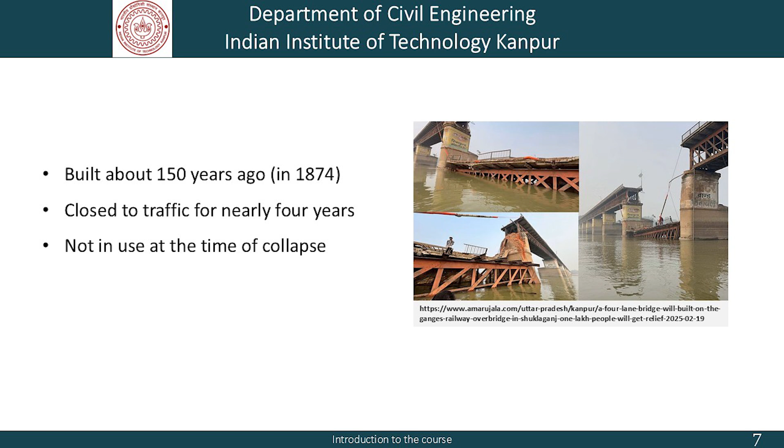And therefore, when we plan infrastructure, we have to keep in mind that whatever we are planning and constructing is going to be in operation for maybe 100 years. And therefore, it's not only the structural issues that have to be kept in mind, but also functional issues, issues such as sustainability, financial viability, and so on and so forth. That is the crux or the backbone of our discussion in this course on infrastructure asset management.

Now, what are the expectations from infrastructure asset management? The management practices should be sustainable, they should be resilient, they should be adaptive to climate change, they should be backed by data-based decision making, and the approach should not be ad hoc. There should be a clear life cycle perspective, and strategic decision making should be utilized to optimize benefit. And finally, there should be a risk-based prioritization, which could be called reliability.

Now, these are some of the words that we hear when we talk of infrastructure asset management, except that we need to understand that all these terms need to be understood in the context of infrastructure management in a uniform way, and all stakeholders, whether it is users, contractors, designers, regulators, or financiers, have to understand and speak the same language. They have to understand each other much better.

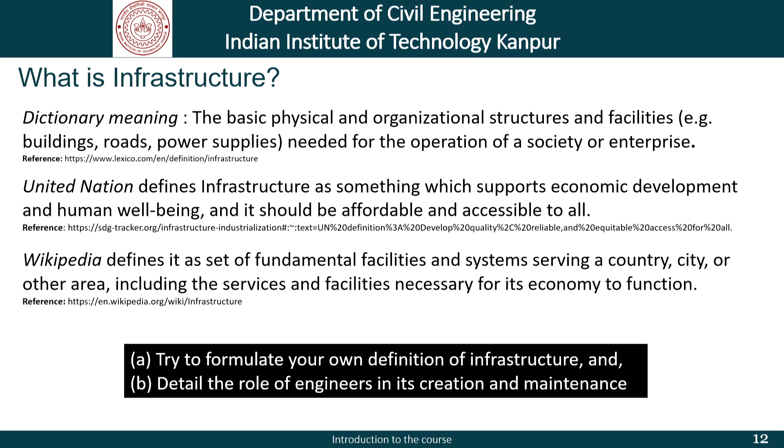You are of course welcome to formulate your own definition of infrastructure and then think about and detail the role of engineers and architects. When I say engineers, I often include architects in that. So, my apologies to my architect friends that I may not mention them specifically at times, but I include them in that fraternity. Detail the role of engineers and architects in the creation and maintenance of infrastructure.

Now, coming to asset, one of the definitions could be it is an item of property owned by a person or company regarded as having value and available to meet debts, commitments, or legacies. Investopedia describes an asset as a resource with economic value that an individual, corporation, or country owns or controls with the expectation that it will provide future benefit.

Assets are reported on a company's balance sheet and are bought or created to increase the firm's value or benefit the firm's operations. Assets are also something that in the future can generate cash flow, reduce expenses, or improve sales regardless of whether it's manufacturing equipment or a patent. So, there are these different ways of looking at an asset.

One simple way of looking at assets would be that say at time t is equal to 0, you had 1 lakh rupees in the bank. You choose to buy land for 50,000 rupees. Now, the moment you do that, what your 1 lakh asset base was has suddenly become 50,000 in the bank and 50,000 as land. So, now when it comes to infrastructure assets, how do we extrapolate this definition? That will be the real question.

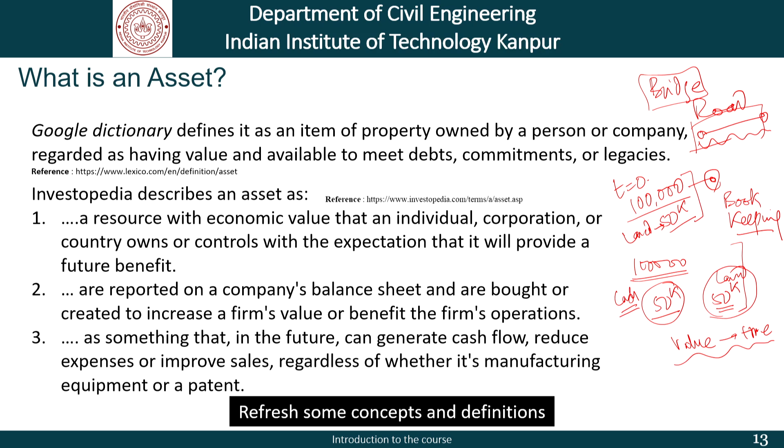And when it comes to management, Wikipedia defines management as activities of setting the strategy of an organization and coordinating the efforts of its employees or of volunteers to accomplish its objectives through the application of available resources such as financial, natural, technological and human.

We can also define management as a set of principles relating to planning, organizing, directing and controlling, and application of these principles in harnessing physical, financial, human and informational resources efficiently and effectively to achieve organizational goals. Now, this definition of management again is there in the books. The challenge is, how do we interpret, what do we interpret in the context of infrastructure assets, which could be roads, bridges, buildings and so on and so forth.

Also, what is the role of technology and therefore engineers and architects in management of infrastructure assets? This is a loaded question. The question being asked really is, there are two ways of looking at managers of infrastructure assets. One is engineers and architects who are familiar with the processes that went into the design and construction of those assets, creation of those assets.

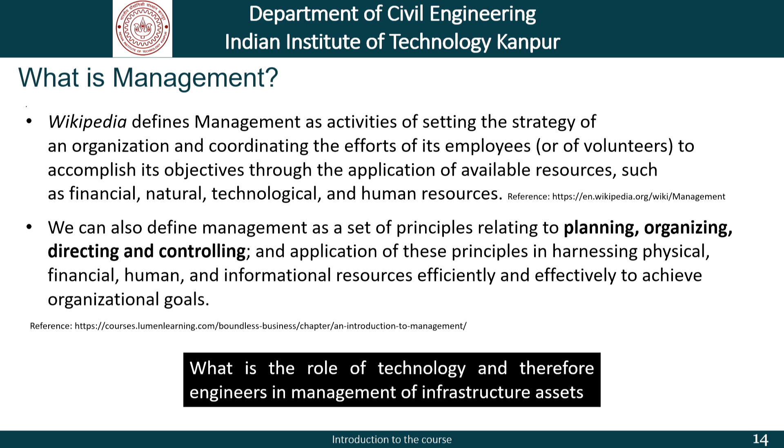So, the question is, which set of people is better suited to carry out the job of infrastructure asset management? I guess I have already given my answer to it. You can think about it and come to your own conclusions. Now, infrastructure is characterized by high life expectancy, maintenance of a product and not a machine.

Infrastructure assets are very often, almost always, publicly owned or controlled, and the investment involved is huge, and therefore, cost benefit analysis kind of a thought process is very difficult to apply. One of the reasons why the private sector was not playing a major role in the infrastructure development was precisely the huge investment and the complexity involved in evaluating cost benefit ratios and the benefits which may not accrue immediately but over a long period of time and so on.

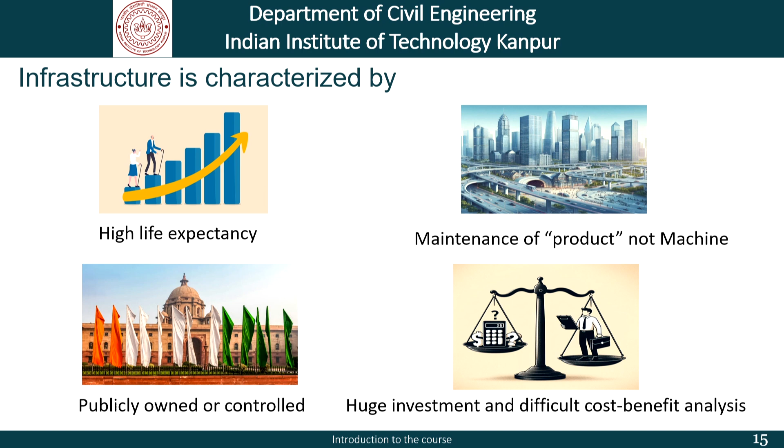That is why it was only the government which had the funds to invest in infrastructure sector, whether it was transportation, whether it was defense or education, health and so on. These were key infrastructure which was publicly owned. Even now, the infrastructure is largely publicly owned, and you can make a survey of your own and come up with your own conclusions. As far as the growth of civil infrastructure in India is concerned, we now see a lot of emphasis on metros.

I said before that in countries like India, where we are building the infrastructure, obviously we will have a lot of investment in these sectors, in these projects, and it is important that our engineers are trained in the thought process of asset management, so that they create assets which are easier to manage.

In the last decade, we have had a lot of development in the road sector, a 60% increase in the national highway network, 3.74 lakh kilometers of rural roads added, and an increase of 500% in the budget as far as highways is concerned.

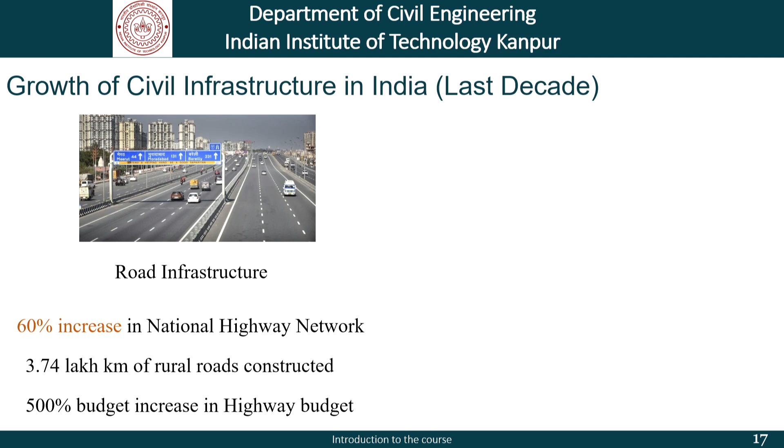Airport infrastructure in India also has seen a huge boom with 84 new airports constructed. Schemes such as UDAN have been launched and 21 additional greenfield airports identified. So, this is all part of the emphasis that the government or the society in India has on building infrastructure.

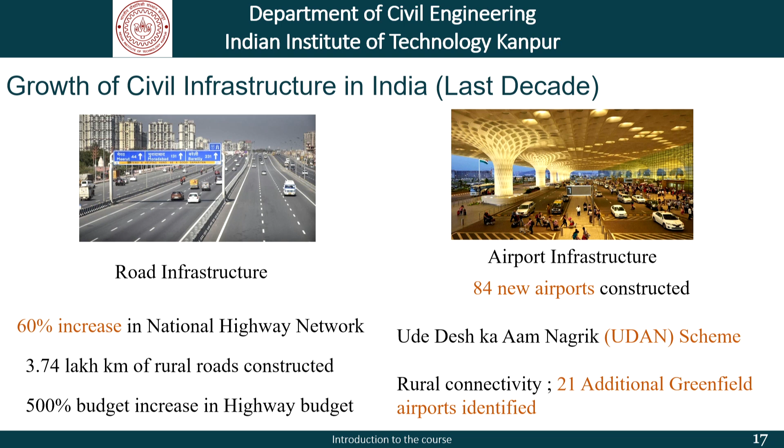Now, a word about the life cycle of infrastructure. The first step is a concept and plan, where you say, okay, let's build a bridge, let's build a road from point A to point B, which will involve some tunnels, some bridges and so on. The next stage is getting down to business and carrying out the design. Remember that till such time as we complete the design, or at least a large part of the design, nothing has really happened on the ground.

Finally, decommissioning. That is the kind of thing that we talked about when I showed you the picture of the bridge in Unnao near Kanpur. And let me also say that if we leave the infrastructure which is not being used just to be on its own and wait for it to collapse or decay or whatever it is, it might be extremely detrimental, as we will see in one of the examples as we go along in this course.

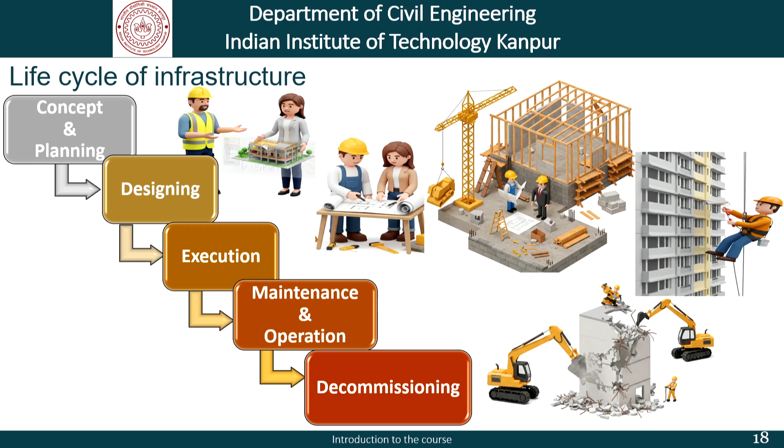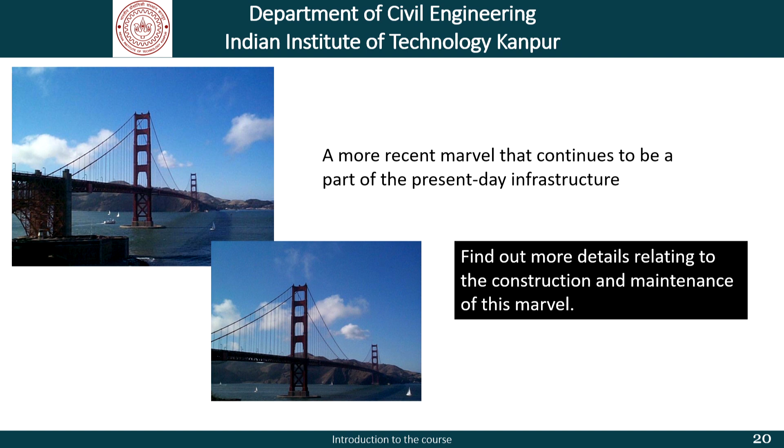This is another modern marvel, which is the Aqua Line, which connects the city of Kawasaki in Kanagawa Prefecture with the city of Kisarazu in Chiba Prefecture and forms a part of a national highway. So, this is the Chiba Peninsula in Japan. This part is Tokyo, and this Aqua Line connects these two points here through a 23.7 kilometer road, which includes 4.4 kilometers of a bridge and 9.6 kilometers underneath the bay tunnel.

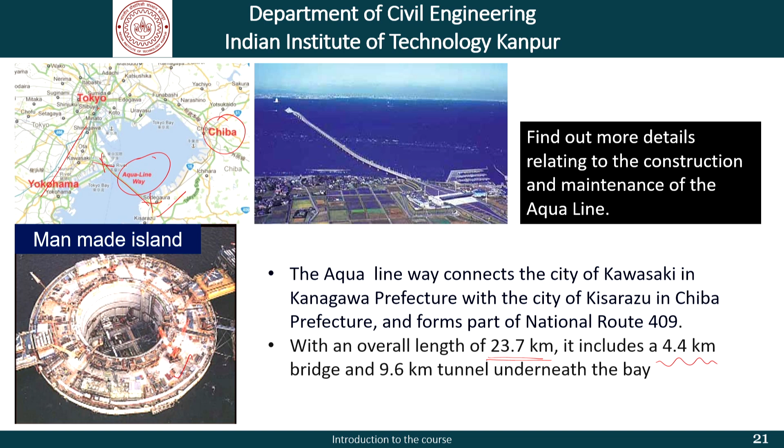Now, this is a man-made island which is created in the middle of the sea, where the transition from the bridge to the tunnel takes place. The important thing that I wanted to show with this kind of a picture, or perhaps the next one as well, is the scale of infrastructure creation. It is a huge investment. It is not easy to do these kind of projects, and therefore, it is important that adequate care is taken to ensure their durability and the fact that they continue to serve the society for a very long period of time. Please do try to find out more details relating to the construction and maintenance of the Aqua Line.

This is another example from Japan, Akashi Strait Bridge, which was constructed about 25-30 years ago. This is another mega project under construction at that time, involving major commitment of resources, and finally it becomes a precious national asset. Here too you can find out more details relating to construction and maintenance of this modern engineering marvel.

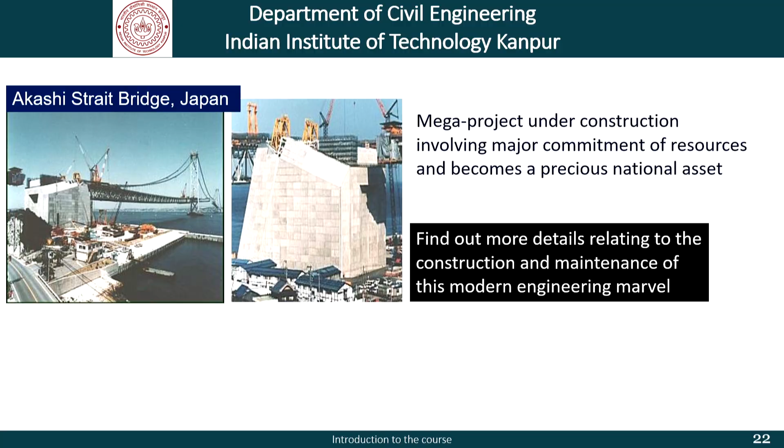The idea of this course is not to emphasize too much the technical issues involved or the technologies used, but to understand that yes, modern technology, mechanization, modern materials, better understanding of material behavior, better understanding of the material environment interaction, better specifications have enabled us to build these huge structures, very massive structures, and it is important that we also understand the importance and the responsibility of maintaining them.

In India as well, the Konkan Railway, the Vashi Mankhurd flyover, Kopili Dam, cooling towers in power plants, all these are examples of investments in infrastructure.

Now, so far we had seen examples of what we build. Now, I want to show you some examples of structures, what they look like after a certain period of time. Now, the certain period of time is a googly. I am not naming how much time is involved, because that varies from structure to structure, and we will discuss it separately. Having said that, here is a structure.

After some time, it is found that the concrete at the time of construction did not reach the ducts of the pre-stressing cables and left a void. As a result, the ducts and cables show a lot of corrosion.

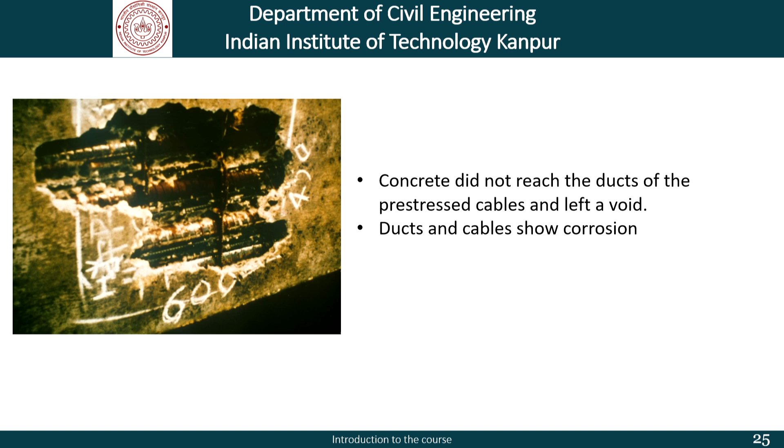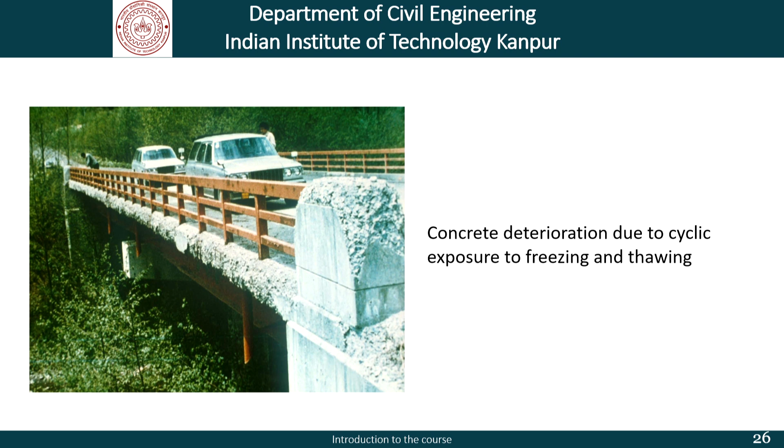Similarly, here concrete is seen to be deteriorating on account of cyclic exposure to freezing and thawing. Here we have a situation where we can see progressive deterioration due to repeated applications of load, which is often called fatigue loading in technical language.

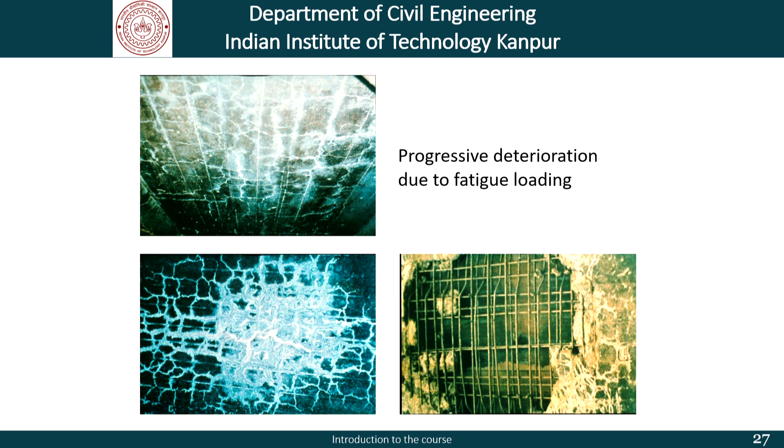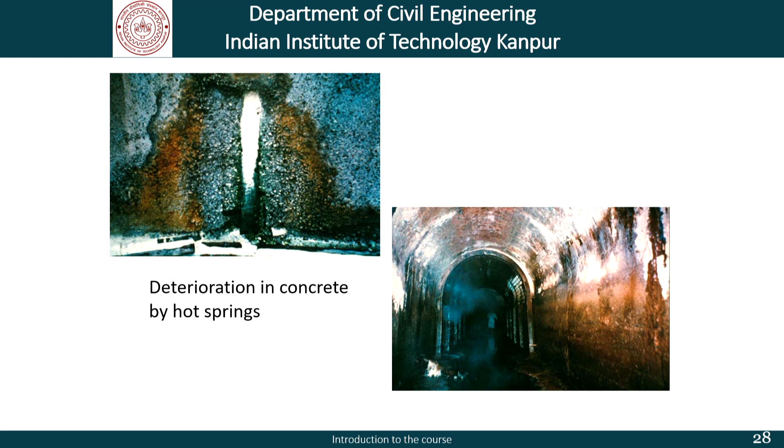Oftentimes, we have our structures in hot springs or other environments, and we can see a lot of deterioration because of that very special environment of hot springs. Corrosion, chloride induced corrosion, carbonation and so on, these are problems that cause cracking and spalling of concrete in reinforced concrete or pre-stressed concrete structures.

So, the point is that what we build today over a period of time deteriorates depending upon the kind of environment that it is in, and that process, unless it is properly modeled, we cannot do management or maintenance of the asset in a scientific or in a rational manner.

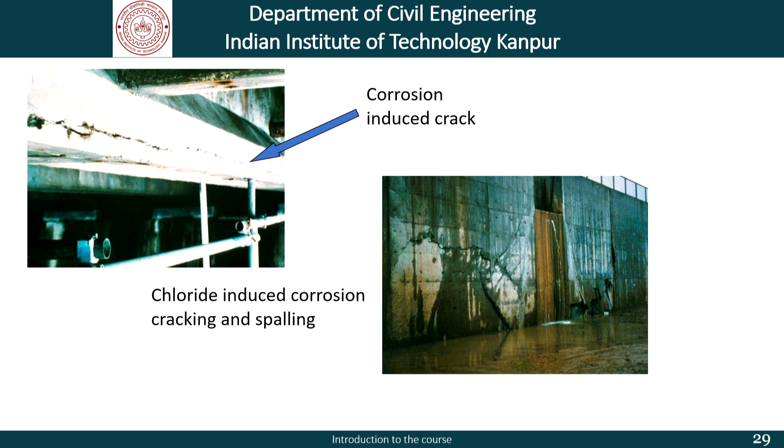Let me assure you that different agencies owning the assets like the railways or the highway authorities, they have their own strategies for maintenance of their assets, but it is only a matter of comprehensiveness. So, I do not say that they are not comprehensive, but we are trying to put forward to you an approach that can be used across the board, better understood and based on the physical processes of changes in performance, changes in deterioration levels.

Now, from all these examples, what I actually wanted to convey to you was the questions that an asset manager needs to be able to answer. Is the asset performing satisfactorily? How long will the asset continue to perform satisfactorily, and is any action or intervention needed?

In order to be able to do this, there have to be physical models which tell us that okay, if the level of deterioration is here today, in the next 5 years it is likely to be here, and then somebody decides whether to take action now or whether to wait and take action after 5 years or 2 years and so on and so forth.

Now, in order to be able to answer these questions quantitatively, we need relevant data to be collected, and that requires resources. It is not easy to carry out an inspection and collect data from a bridge where accessibility is not provided for. Parts of structures which are part of the infrastructure system are very inaccessible. Anything that goes below the ground is typically inaccessible, and we have to have very special tools to collect any information that we want.

Information from the design and construction stage should be available. Relevant information about any event or action in the past should be available. So, if we are looking at a structure today which was built, let us say 40 years ago, we must also have information as to what kind of repair, what kind of rehabilitation has been done on that structure in the last 20-30 years. And then we can probably make a better estimate as to how that structure is going to perform in the next 5, 10, 20 years.

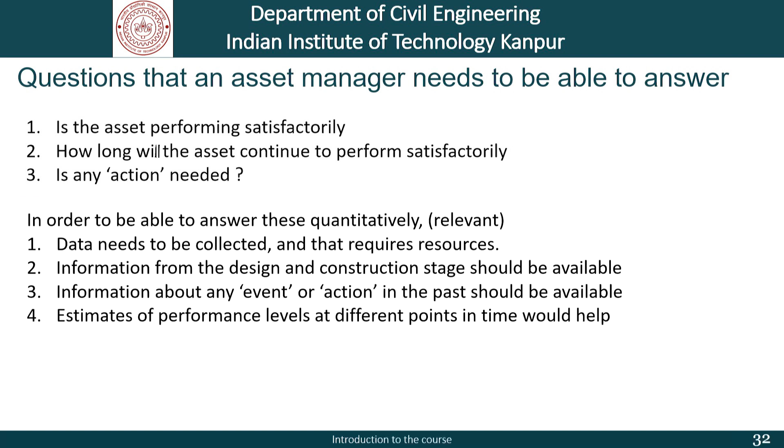Estimates of performance levels at different points in time would help. So, these are some of the strategies that we need in order to be able to carry out a comprehensive asset management.

Poor infrastructure rating is not a problem in India alone. In the United States, the ASCE, or the American Society of Civil Engineers, in 2013, 2017 and 2021, declared their infrastructure condition rating to be a D, which is poor and at risk, and 43% of public roadways are in poor or mediocre condition. As far as China is concerned, reports suggest 78.2% of the total roads need maintenance. As far as South Africa is concerned, the overall infrastructure condition is rated as D.

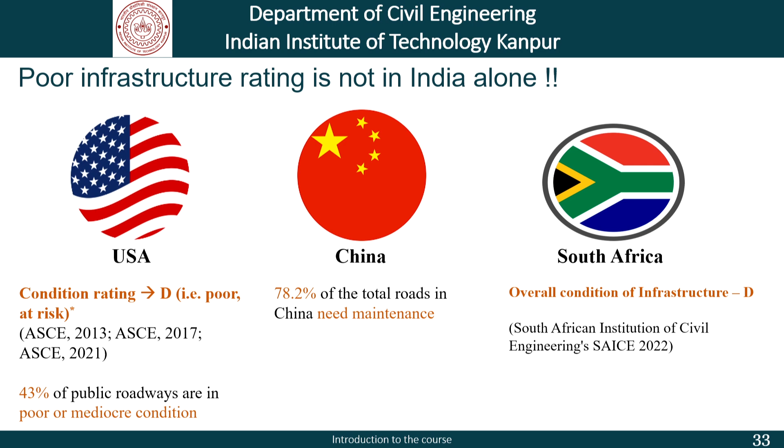So, the point again is how old is the infrastructure, and that brings me to the question that if the infrastructure is built at a certain level of quality specifications, it is likely to perform better in comparison to other infrastructure which is built at a compromised specification. So, these are the kind of thought processes that we will talk about as we go along in the course.

Given that infrastructure creation requires massive capital investment, the question is: is infrastructure in a country related to development? In other words, because a country is developed, it has a well developed infrastructure, or because a country has a well developed infrastructure, it is developed? I am leaving this question to you, and you can think about it and come to your own conclusions.

As far as infrastructure is concerned, let me give you some examples. It could be education, energy, health, defense, manufacturing, any amount of list we can create. There could be telecommunication, housing, water, transportation, agriculture and so on. And the point is, are they mutually exclusive? Try to find out if there are some interconnections.

And again, what is the role of engineers and architects in creation and maintenance of these infrastructure, whether it is education, energy, health, defense, manufacturing, telecommunication and any other. Now, we need to break down the infrastructure. We need to understand it better by saying that okay, if it is educational infrastructure, it could be buildings, laboratories, other facilities for extracurricular activities and so on, equipment and manpower.

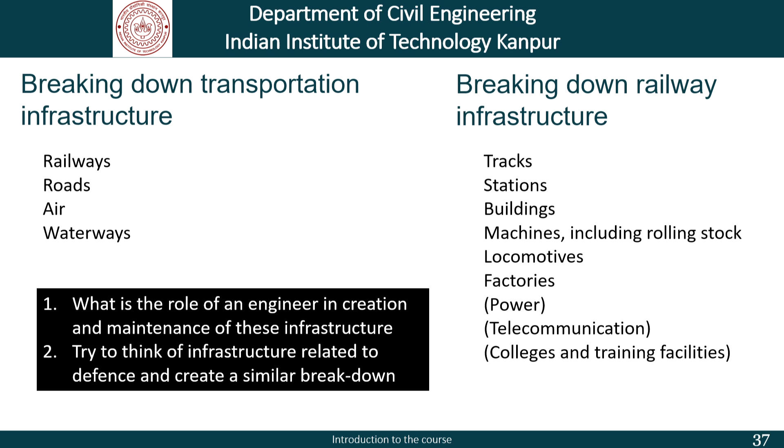Now, what is the role of engineers in creating them? And try to think of infrastructure related to defense and create a similar breakdown. If you are talking of defense, for example, you could be talking of army, air force, navy, a cyber kind of defense. You could be talking of space, and then each of them will have their own structures, and that is all part of the defense infrastructure. So, what we are trying to do in this course is to create a system by which we can at least conceptually look at asset management in a certain unified manner.

Now, moving forward and trying to close the discussion for today, what we really need is a quantitative understanding of performance of an infrastructure facility. We need to understand the change in this performance over time, and that is an integral part of the effective management strategy. The parameter that we use for performance should be an integral part of the design process and serve as a benchmark to determine expected performance at a certain point in time in the future. And that parameter needs to be inspected and monitored as part of the inspections and maintenance processes in the infrastructure or that structural element over a period of time.

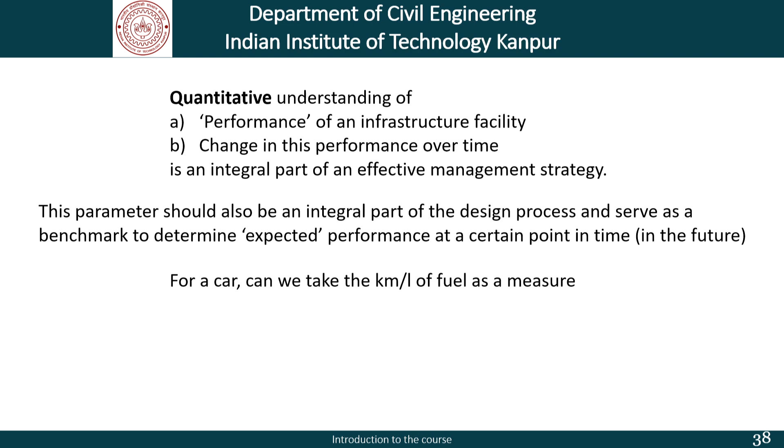For example, in a car, we can talk in terms of kilometers per liter of fuel as a measure. So, if there was a model which says that a new car gives you, let us say, 15 kilometers per liter, and as it ages, it starts giving you less and less, and you decide that the car will be scrapped or it will not be useful to you if the mileage that you get drops below 8. So, all these are arbitrary numbers, 15, 8, the rate at which it falls will depend on how you drive, where you drive and so on, but that is a number nonetheless. So, that is the kind of process that we are talking about and trying to see whether in the infrastructure sector we can find equivalent parameters for monitoring the performance.

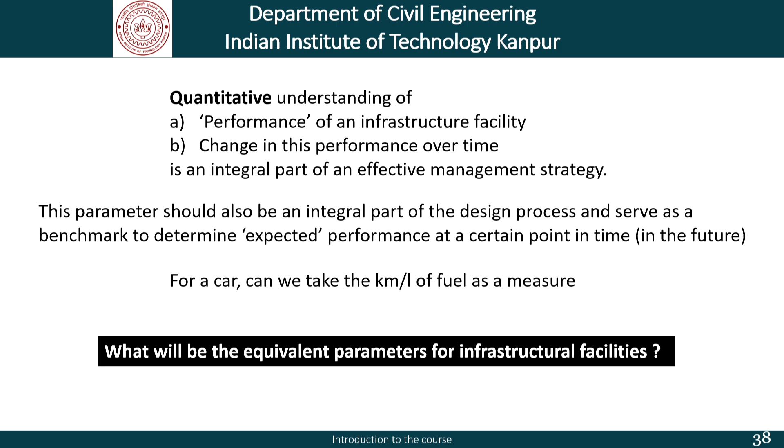So, with this we come to an end of the discussion today, and in the next class we will talk about deterioration and performance changes over time in the infrastructure. And before we close, I will share with you a list of references or material for further reading, which will help you understand the subject matter covered today and being covered in this entire course.